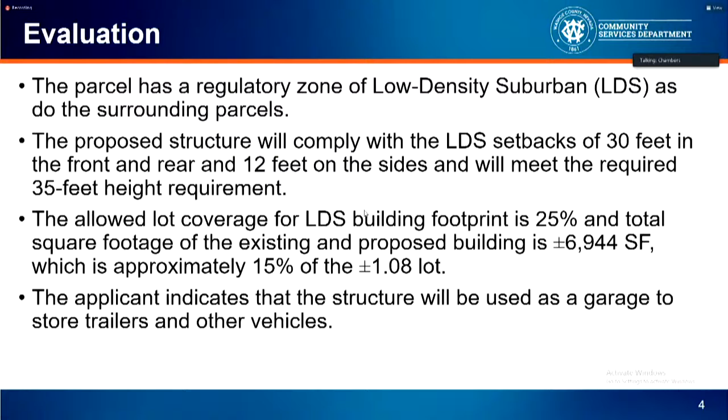The applicant has indicated that the structure will be used as a garage for storage of trailers and other vehicles.

The parcel is relatively flat, and the proposed detached garage will be located in the rear of the property behind the residence. The structure will have electricity and gas to power a heater, and it will be connected to the septic and community water for the bathroom in the structure.

A condition has been included that requires the applicant to obtain a deed restriction at the time of the building permit to prevent the structure from being used as an accessory dwelling unit. The area on the north and south side of the garage will be landscaped, and the structure will be painted a similar gray color as the house.

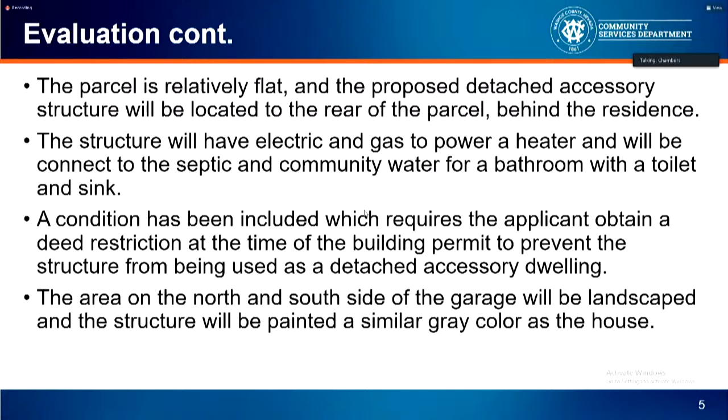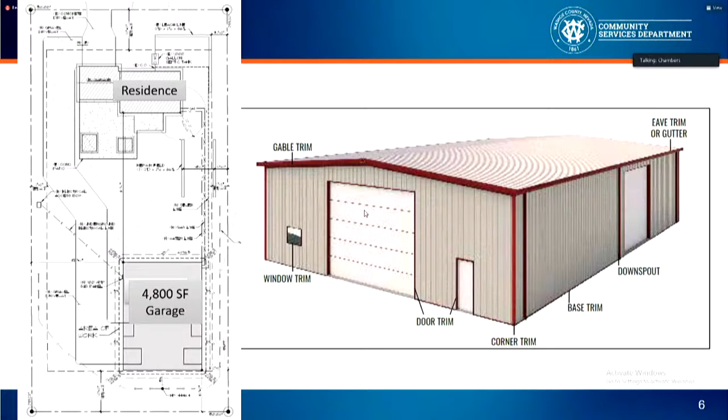Here's a view of the footprint and elevation of the structure. You can see the garage is at the rear of the residence. The residence is at the top of the screen, and the garage is at the bottom.

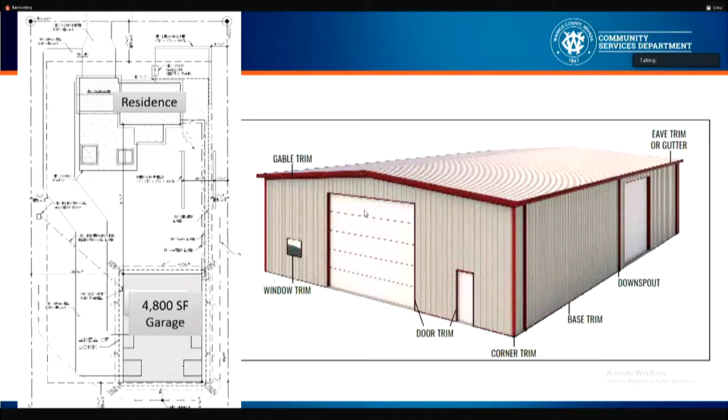Various agencies have reviewed this application, and any conditions from those agencies are included in the conditions of approval. Staff is able to make the findings as detailed in the staff report. There was no neighborhood meeting required for this kind of application. 31 parcels were noticed, and I did not receive any phone calls or emails.

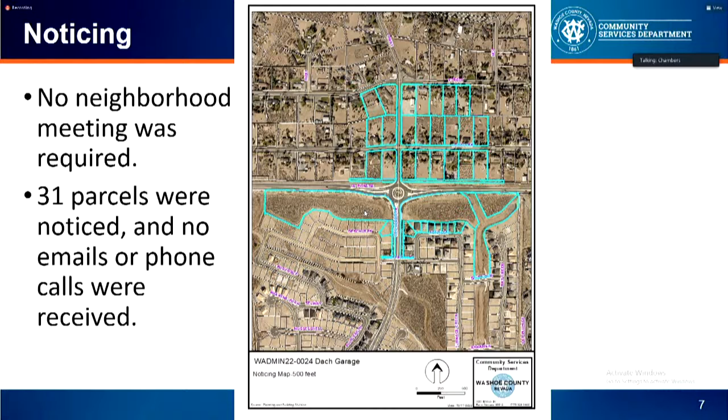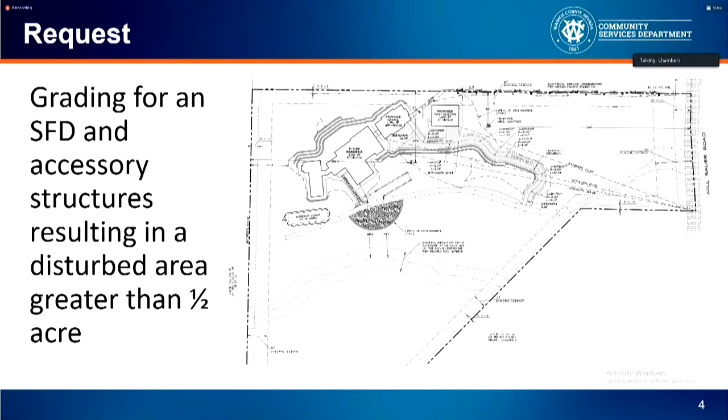Like I said, the grading is for a new dwelling and 2 accessory structures. It will result in a disturbed area greater than half an acre, and that's what triggers the need for a special use permit. Here's an enlarged, but still hard to see, version of the grading plan. I'll dig into it a little bit more later, but you can see there's an access road from an existing road on the property, a few retaining walls, and other site improvements that require the grading.

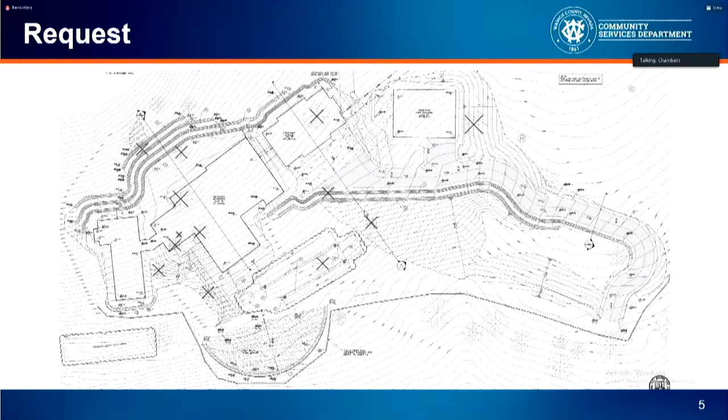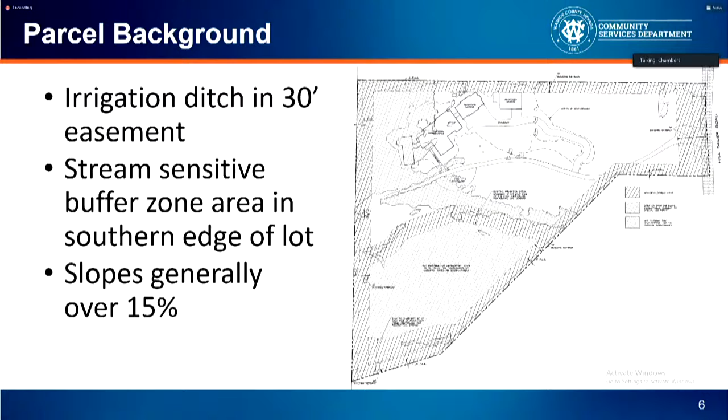The parcel has quite a bit going on it. There's an irrigation ditch within a 30-foot easement that runs across the property, kind of in the middle there. You can see it marked out with some linear hashes, and there's also a portion of a stream-sensitive buffer zone area on the southern edge of the lot for a watercourse that runs on the parcel to the south. In addition, it's generally characterized by slopes over 15% and has a significant area of slopes over 30% as well.

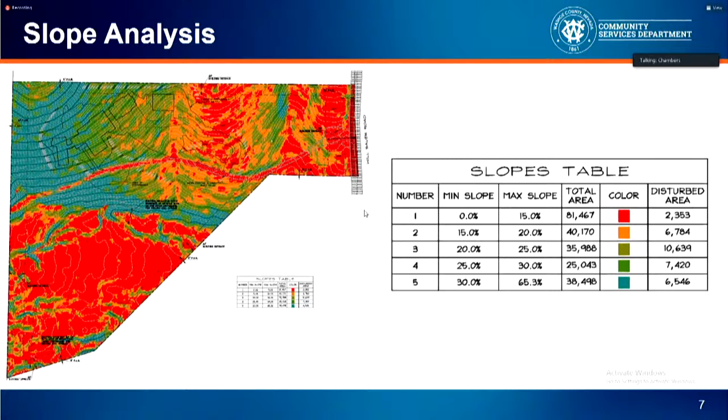Here is the slope analysis that they provided. Red is the flatter areas and blue is the steeper area. You can see that the proposed location of the residence does encroach a little bit into that 30% or steeper area, which I'll expand upon in a moment. But you can see there are some flatter areas on the southern portion of the lot and then also closer to Will Sauer Road.

To talk a little bit about the details of the grading as it relates to our grading standards, all the retaining walls that they've proposed are 4 feet or shorter. There are proposed 3-to-1 slopes, which is within the bounds of our code. And as I said before, there is an existing access road that they're utilizing, which will help reduce disturbance. So overall, the grading you see here is all in line with our code and complies with all of our standards.

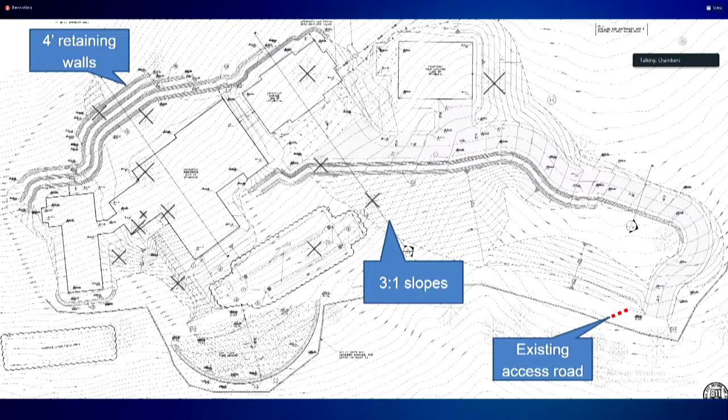One other element of this property is that the hillside development standards of Article 424 are applicable. That applies to residential lots created before 1994, when this was adopted. One of its elements, in addition to some standards which I included in the conditions of approval, is a determination of developable area.

That's the area not characterized by qualities that make it less suitable for development, including slopes greater than 30%, areas of landslides or landslide potential, areas with recently active faults, habitat for rare and endangered species, and significant streams, ravines, and drainage ways.

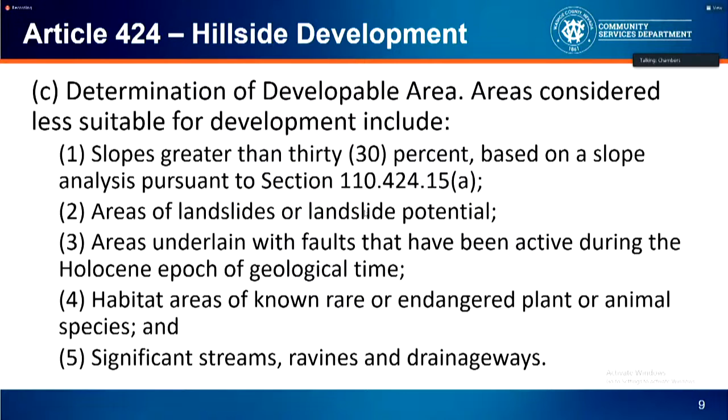Part of the submittal requirements for applications where these standards are applicable is a developable area map, and you can see that here. It has the features we discussed before: the stream buffer zone area, the irrigation ditch. In between that, according to the geotechnical report, there was some evidence of previous landslide activity, which is why that's marked with the chevron-like hash marks.

In the northern portion of the lot, you see in green a relatively contiguous area with slopes less than 30%, and then another area with slopes greater than 30%. As you can see highlighted in red, a portion of the proposed house does go into that area.

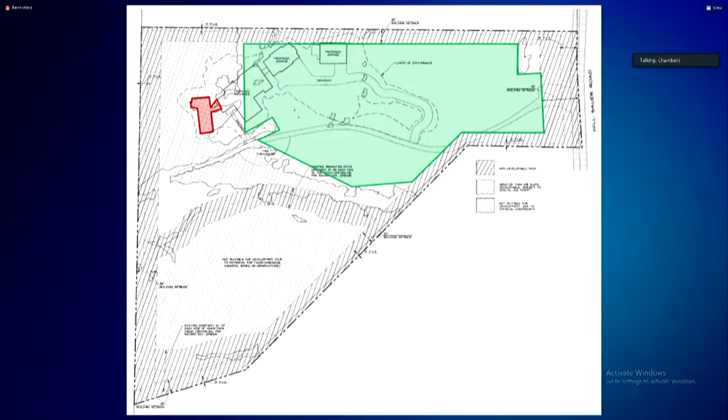That brings us to the question of when encroaching into that area is allowed and when it's not. There are provisions in the hillside standards that allow exceptions to the rule of staying out of slopes greater than 30%, and that's when there are extenuating circumstances.

One of the things staff did while reviewing this was ask the applicant to address those potential circumstances. A memo to that effect was included as, I believe, the last portion of the application packet that you all received. The main thing they referenced that was significant to staff was that the location of the house helps maintain a greater number of existing native trees.

The reason that's significant is that, as I go through in the staff report, the maintenance of existing vegetation is one of the stated goals of the hillside development standards. Since the threshold laid out here is extenuating circumstances, staff thinks that could be considered an extenuating circumstance to encroach a bit into those 30% or steeper slopes.

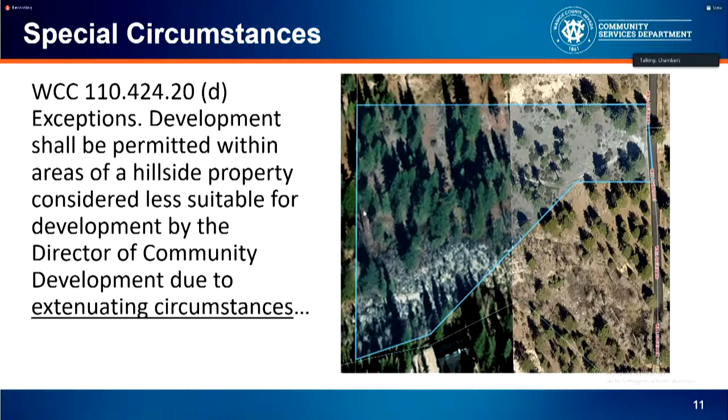With that in mind, 18 agencies reviewed this and provided conditions as well. Notice was sent out as usual, and staff can make all 5 findings: consistency with the master plan and area plan, adequate improvements, site suitability, issuance non-detrimental, and effect on a military installation. I'll mention that, as you saw in the packets, a number of comments were received from surrounding property owners, and they were all neutral or in favor of the proposed application. So with that, here's a sample motion for approval with conditions, and I'm happy to answer any questions.

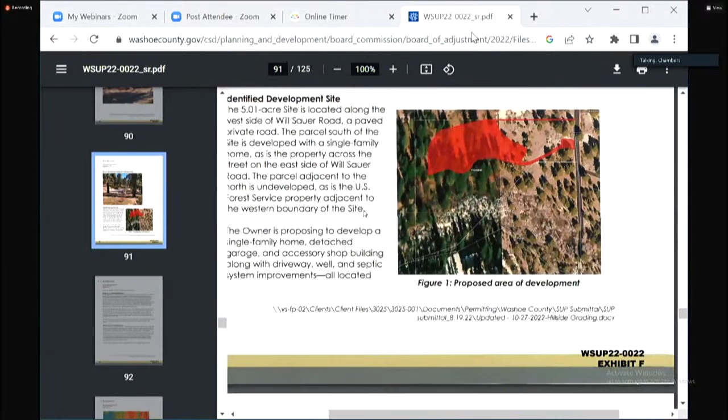The chair asks for further questions. Mr. Stanley asks about the mention of mature trees and trying to save them, wondering if there's a ballpark figure for what 'mature' means in years. Staff responds they don't have an exact figure in years, but having conducted a site visit, noted a number of trees are quite tall and generally look very established, and refers further details to the applicant.

Seeing no further questions for staff, the chair asks if the applicant is present and wishes to speak on the matter.

Rob Anderson introduces himself as a professional engineer registered in several states including Nevada, and the applicant's representative. He notes Ms. Dolan, the applicant, is also present via Zoom to help answer questions. He states he wants to be brief and that the staff report, as Mr. Christensen pointed out, was very thorough and well done.

Mr. Anderson states the applicant concurs with each of the findings. His staff at R.O. Anderson Engineering, including professional planners, landscape architects, and civil engineers, went through the findings in great detail and concur with the assessment, and agree with the conditions of approval. The applicant is anxious to proceed with constructing their primary residence and the facilities shown in the plans.

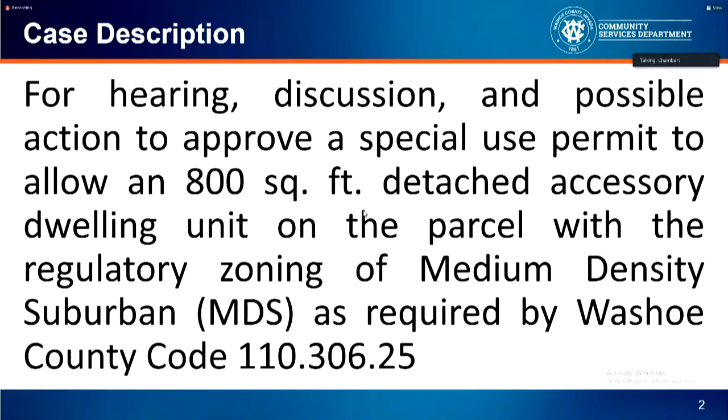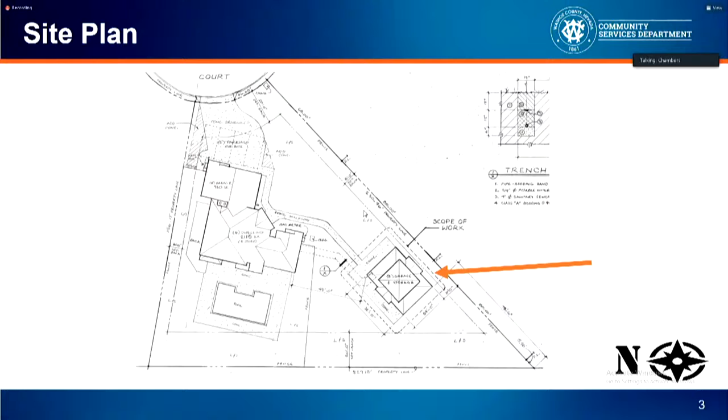One moment please, there we go. Of approximately 800 square feet or a little bit less, within a parcel that is zoned medium density suburban, MDS, in the Southeast Truckee Meadows area plan. Here we have the site plan, north is to our left here. There's an existing detached accessory structure that's going to be heavily remodeled. The bottom floor will essentially remain a garage, and a new second story will be the proposed accessory dwelling unit.

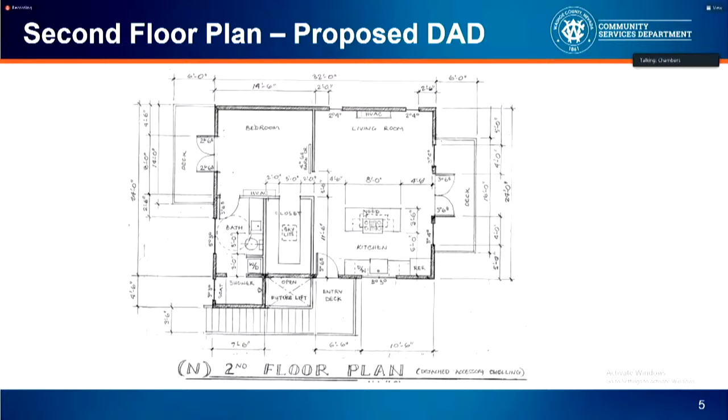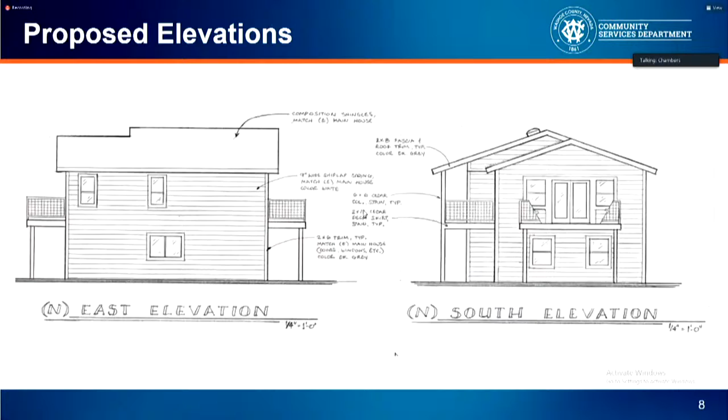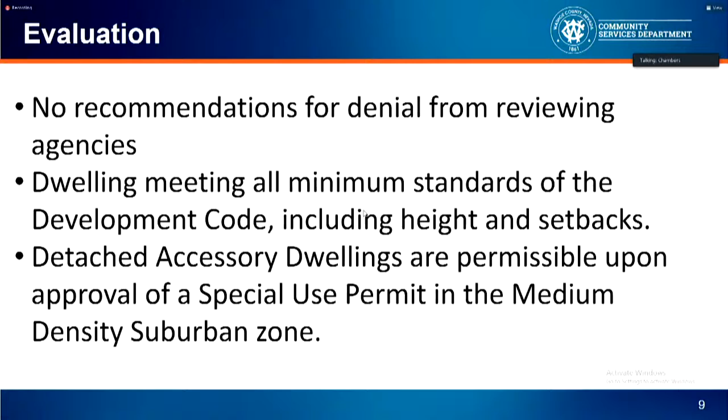This was provided to all of the relevant agencies, we had no recommendations for denial. This will meet all of the required setbacks for the regulatory zone. Detached accessory dwellings are permissible in the MDS zone subject to the approval of a special use permit. Public notice was provided, and that map and documentation is included at, I believe, Exhibit D in your staff report. We have comments on each of the required findings. Staff believes that all of those required findings can be made.

We did, however, have several letters in opposition. About 4 of them were included with your staff report, and another 4 were received by staff after your staff report was completed. I believe all of those letters can be characterized as expressing that this proposed project will be detrimental to the character of the surrounding area. That is their opinion, they have the right to express that. In addition to the 4 included with your packet, these were also provided to you prior to this hearing, and there they are. In the interest of time, I'm not going to read each one of those in as they have been provided to you.

After a thorough analysis and review, I am recommending approval of the proposed detached accessory dwelling with conditions as included in your staff report. Should you agree, we have a proposed motion. On the other hand, should you disagree, we also have a motion available for you. And with that, I'm available to address any questions you may have.

Thank you, Mr. Pelham, I do have a couple questions. On Exhibit A, under the Washoe County Development Code, it says this is an amended application. Do you know what was amended? Initially, the plan submitted included turning the first floor into a dwelling and having a stairwell up to a second floor they were calling storage, but the way that was configured, it was all as one, and the storage area would have been included in the dwelling unit, which is bigger than allowed in the regulatory zone. In the MDS zone, a detached accessory dwelling is limited to a maximum of 800 square feet. This one's about 768 under the submitted plans, so we're still okay. Our notice was for 800, and we can always do a little bit less than that.

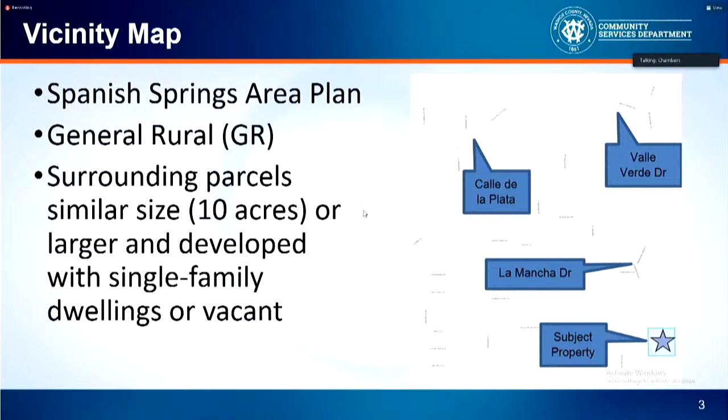This property is located at 2410 La Mancha Drive, in Spanish Springs. It falls within that area plan, and you can see here it's near Calle de la Plata, that area. It's zoned general rural. The parcel is 10 acres. The surrounding parcels are either a similar size or bigger, 40 acres, and are generally developed with dwelling units or are vacant.

This proposed grading is for a dwelling and some associated site improvements that will result in more than half an acre of disturbance and excavation of more than 5,000 cubic yards. Both of those things would trigger this special use permit.

There is also a request to vary standard 438.45C to allow for a difference from natural grade of 19 feet. The code generally limits it to 10 feet.

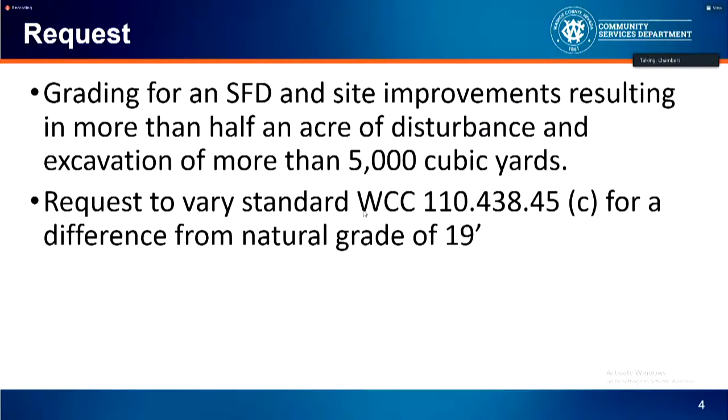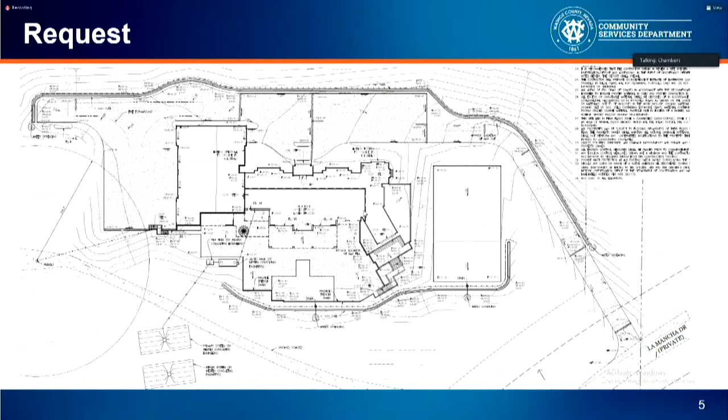Here's a figure of the grading. As you can see, a couple of retaining walls, there's the home, and then pretty extensive site improvements as well. You see a field there to the right of the residence, and then the driveway and parking and those sorts of things. So all that's part of this grading request, or rather, the grading request will support those improvements, and the improvements will be permitted down the line.

To give some background on the site, slopes are generally 10 to 40%. You can see in that figure, it's mostly under 30%, but with significant slopes throughout the site. It's generally vegetated with brush, and this site, because it's on a pretty exposed hillside, is visible for quite a long ways downhill. So that's something to keep in mind, and that will be relevant to some conditions I've proposed later.

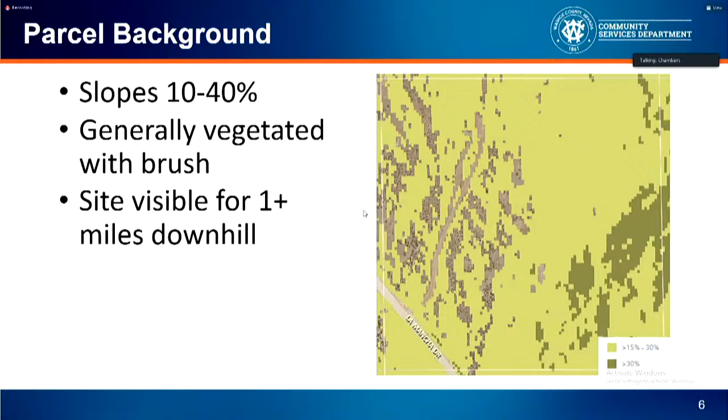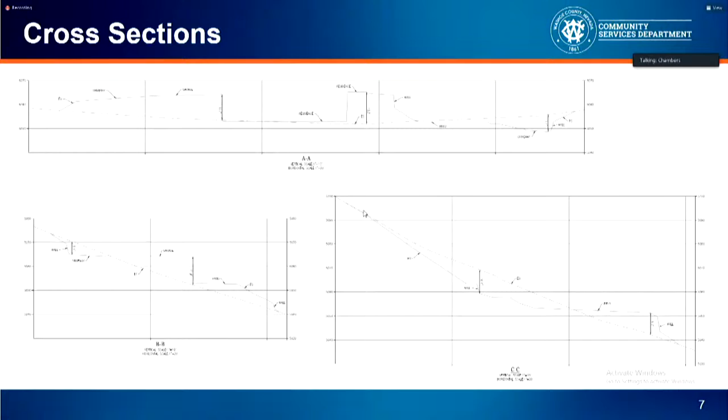Here are cross sections provided by the applicant. The one on top is taken parallel to the grade, so it's across the whole site. You can see the dip there where the residence is, the garage up above there, the field, all that sort of stuff. And then the two below are taken perpendicular to grade, so those are where you can see a bit of terracing, which is something we like, those design elements. As I mentioned, they are requesting a 19-foot difference between natural grade and finished grade. We don't have a cross-section showing that, but I believe that's in the middle of the proposed residence.

Some details about the grading: there are 2 retaining walls proposed. The one above the site improvements is 4 feet. The one below is 6 feet. There are 3-to-1 slopes proposed, and all this falls within the bounds of our grading code. The one deviation they're asking for is for that 19-foot difference.

You can see here they're pretty large, long retaining walls. And so one of the standards in our code is that 90% of any cut slopes be shielded either by buildings or by landscaping. So that's one of the proposed conditions, 1F.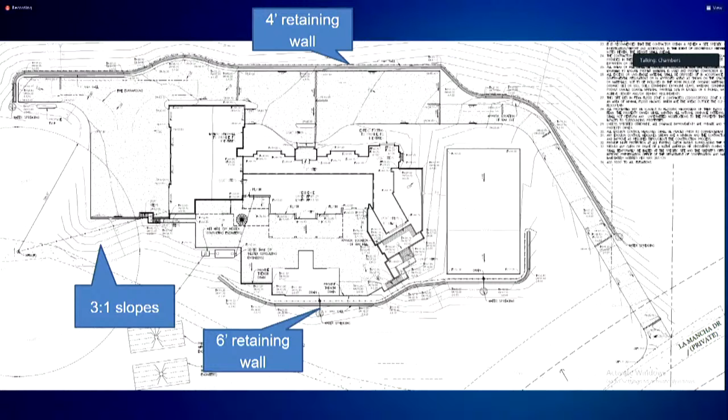And you guys have been handed some proposed modifications to staff recommended condition 1F that basically allows for a bit more flexibility in arranging the landscaping, and differentiates between that upper retaining wall, which is where we have that code requirement for 90%, so that's reflected in the condition. I'll just pull it up. The changes are highlighted in red, and then 50% total coverage of the lower rockery wall. So the reason this condition is proposed is because, like I said, there's a lot of visibility of the site.

That would be true whether or not it was the extensive grading or any house, it's going to be visible just because of where it is. Since they are asking for that 19-foot difference, the intention of this condition is to mitigate the visual impacts by softening the look of just a wall of rock or of green. That's why this condition is proposed. I'm happy to answer any questions about it.

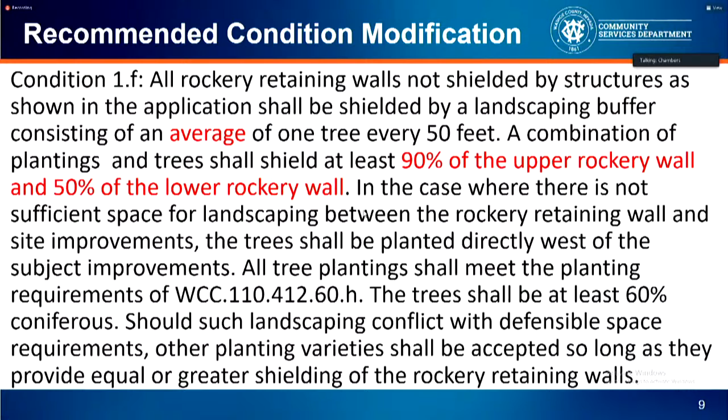Another note is that the construction time condition on this one doesn't include that equipment start-end time clause. So if you guys want to make that modification, let me know, and I will include the condition from the previous grading staff report.

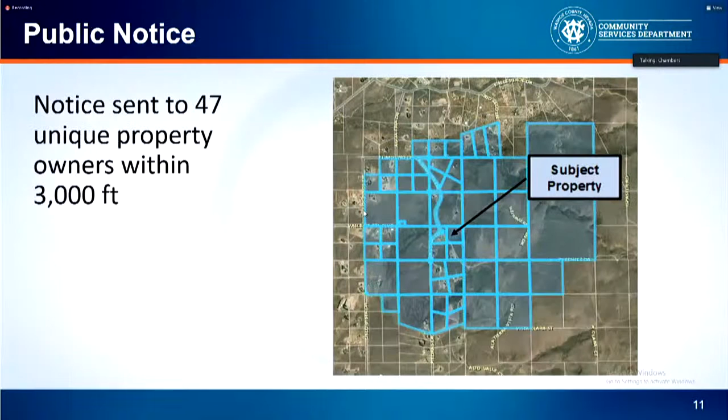15 agencies reviewed this. Some provided comments, some provided conditions. Notice was sent out as usual. I haven't received any phone calls or emails or comments. Staff can make all 5 findings for approval: consistency with the master plan and area plan, suitable site improvements, site suitability, issuance not detrimental, and no effect on a military installation.

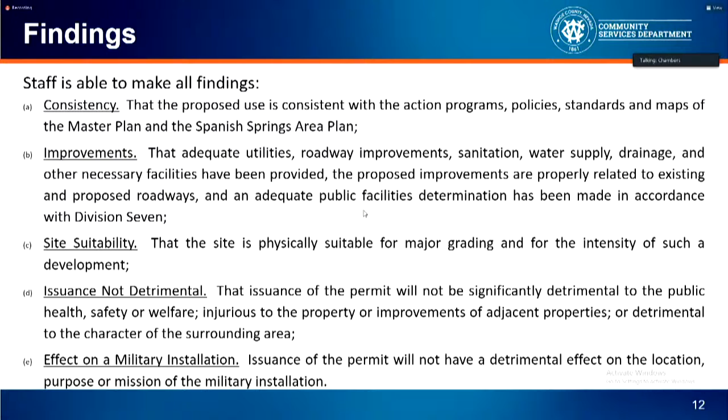Thank you. Are there any questions for staff? Mr. Stone. I'm sorry. Ms. Julian, go ahead. Thank you.

Yes, for staff, there's a reference in the Conservation District comment that if roadside ditches are constructed lining the flow line with 4 to 6 inch rock, it will minimize transported sedimentation. Was that covered somewhere in the conditions or in the design?

So engineering provides conditions regarding drainage and those sorts of considerations. They provide conditions that were sufficient to meet their standards. I did not add anything additional outside of their conditions that they proposed.

If I may weigh in also on that, oftentimes we get these comments from the Washoe Storey Conservation District, and they're more of a recommendation or a suggestion. We are very cautious about conditions that may overlap with the review requirements of our engineering department. The last thing we want is to impose conditions that may be in violation of engineering standards. That's why this condition was not added.

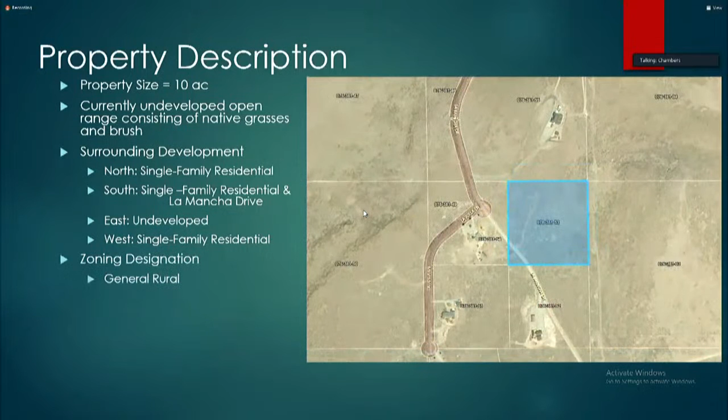The property is located at 2410 La Mancha. There's existing single-family development north, south, and west. It's undeveloped to the east. The zoning is general rural, and the master plan is rural. The proposed development is consistent with those zoning districts and master plan.

The proposed improvements will include a house and the associated driveway, utilities, rockery walls, etc. The grading special use triggers are for earthwork volume, as well as a variation of standards for 13 to 19 feet of cut and fill.

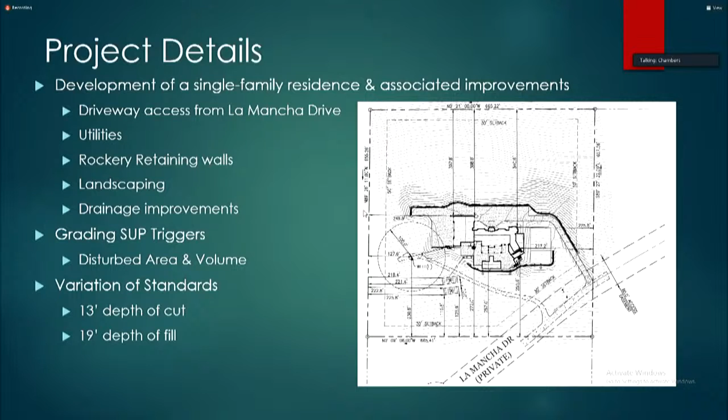As we're coming down the slope and terracing, there's a balancing act we play. That 19-foot cut or fill sounds excessive, but later in our presentation we'll get to where that is, and hopefully that will calm down some of the concerns.

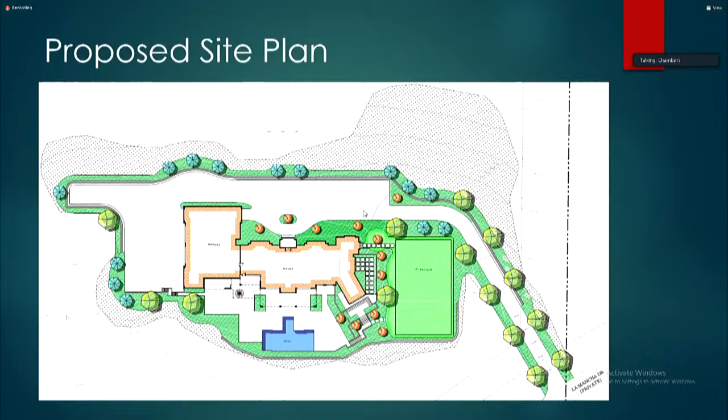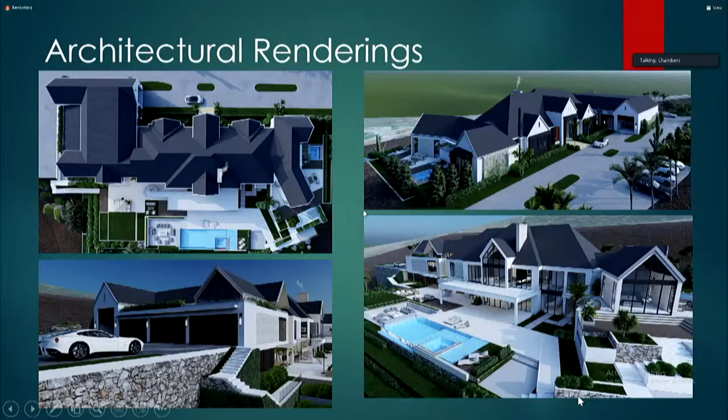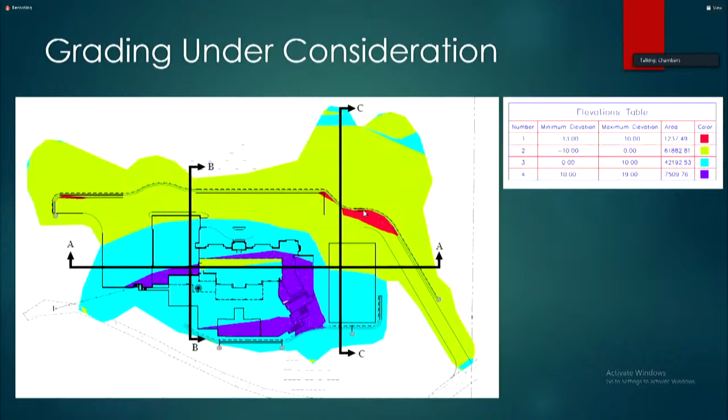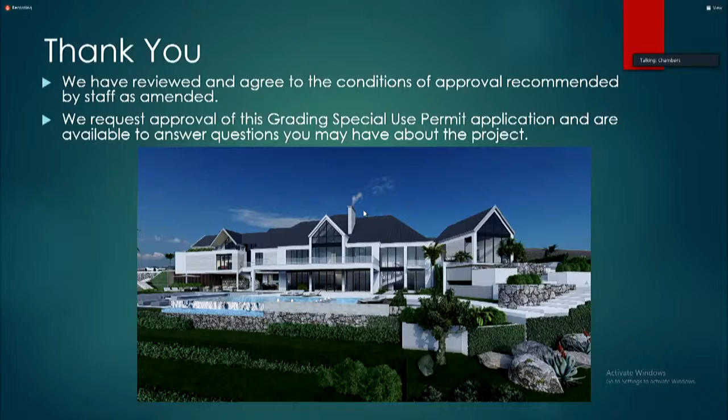We have reviewed the conditions of approval and worked with staff to amend condition F. We are also more than open to limiting construction mobilization to 7 a.m., not even turning on equipment, and are happy to answer any questions. The applicant, Mr. and Mrs. Rappy, are both here, and the landscape architect is here as well if you've got any questions, and I'm here on the civil engineering side to answer those as well. So we thank you for your consideration and request your approval.

Thank you. Is there any questions for this gentleman? Seeing none, thank you very much. Do the applicants wish to add anything further to this? Yes.

I wanted to point out that the property, you can't see how the actual grade is, but it's sloped like this. So we put the house in the middle of the slope to decrease the amount of fill or cut we had. But to get the driveway up there, we had to come up on top of that hill, and we're filling the center of that section. So there's two sections that are probably 20 feet higher than the dip. We put the house in the middle to decrease the amount of dirt we had to bring in or take out.

So that's where a lot of what Mr. Christian was saying comes into play. Because we moved the house, I actually made him redo that 3 or 4 times, trying to get it to where we didn't have to cut as much or bring as much in or do as much work to the land. Secondly, the rock wall, we're going to use all the rock from that area, so it'll be colored as you'd expect. It's not like we're going to Home Depot and buying red bricks or the big concrete blocks they use. They're actually going to be indigenous rock to the area.

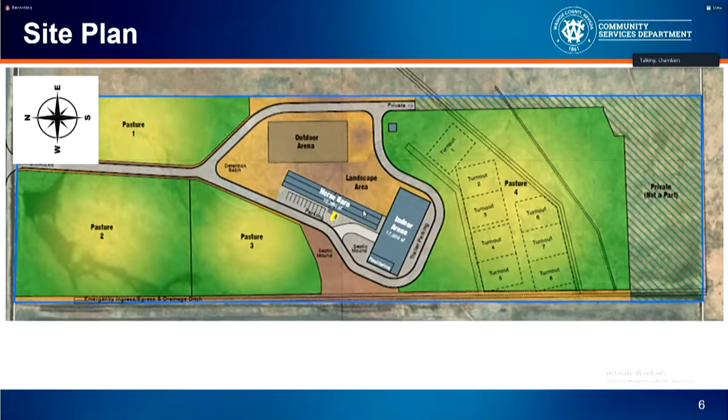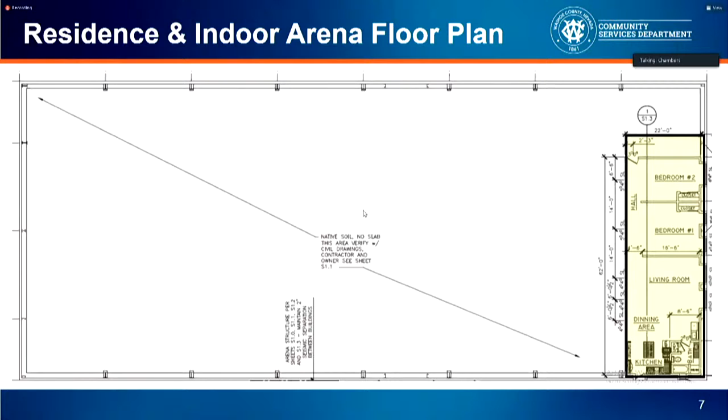And here is a layout of the floor plan of the arena and the residence. The residence is highlighted in yellow. And then this is the barn with stalls. There's an office, restroom, area for tack to be stored, and so forth. There's 31 stalls in this barn.

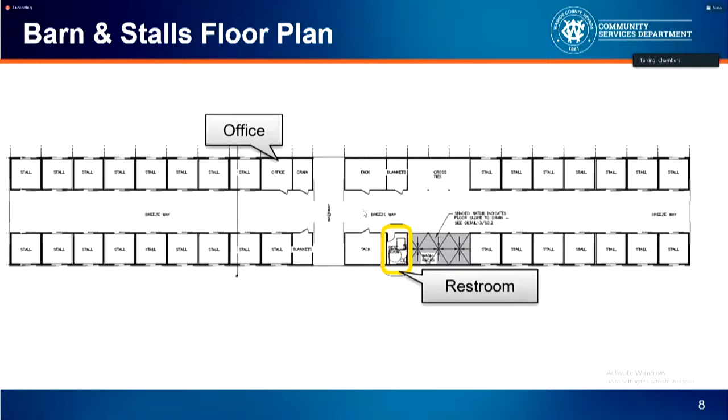The majority of the 20-acre site will remain open to pastures, with the 3 pastures in the front and 8 turnout areas in the back. The facility will only have training for the horses that are boarded at the facility. Horses will not be brought onto the site if they are not boarded there.

The hours of operation are 8 a.m. to 6 p.m., 6 days a week. There will be 1 caretaker on the site 24 hours every day, along with 7 employees, 4 full-time and 3 part-time staff. The stalls will be cleaned daily, and flies will be managed with a product called Fly Predator.

The site is relatively flat, and they're only proposing to grade approximately 3,756 cubic yards, which does not meet the major grading thresholds, so there's no special use permit required for the grading.

Access is from William Brent Road, a 2-lane road, and there's also an emergency access along the western side of the property where there's a ditch. I'll show you a picture of that in the next slide or two.

The applicant indicates that traffic generated will be minimal, about 20 average daily trips, with a peak flow of 4 to 7 in the AM and PM. Due to the minimal increase, no traffic study is required.

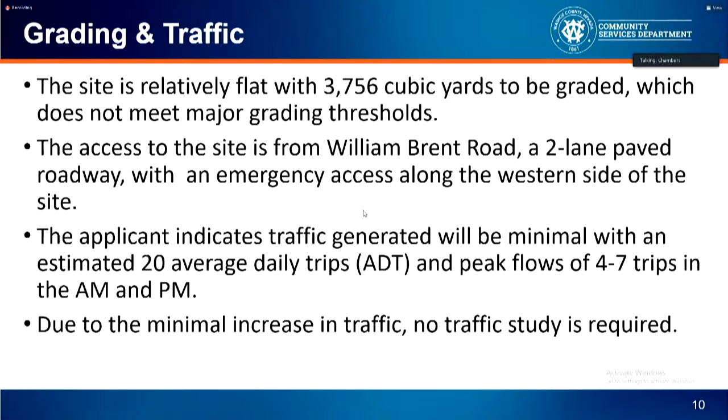Parking for a horse facility is based on the number of horses on the property—basically 1 parking place for every 4 horses. So with 31 horses, there are 8 parking places required, plus additional parking for employees. The applicant is providing 15 parking places, which should meet the needs of the site.

There's parking along the west side of the barn, and one paved ADA parking place. Trailer parking will be located at the south side of the barn, which I'll show in the landscaping picture.

Landscaping for this property is required at 20% of the site since it's commercial. The breakdown is approximately 0.86 acres landscaped with ornamentals, about 0.8 acres of native landscaping, and 6.3 acres used for pasture. The proposal includes about 73 trees and 483 shrubs.

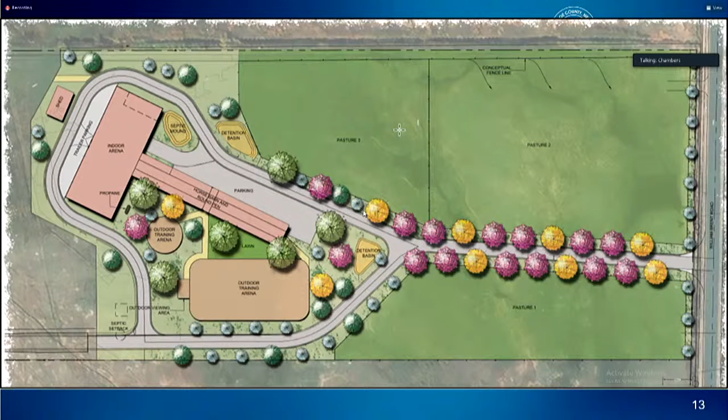As I said earlier, they are asking for modifications—specifically not to have to pave the driveway, parking area, and maneuvering area, though they will pave the ADA parking space. This is fairly typical for riding stables because of the safety of horses and riders, since horses can slide on pavement.

If a horse gets excited and there's a rider on it, they can come off, and it's not a pleasant thing to come off on pavement. It's not pleasant to come off a horse anyway, but on pavement it's even more dangerous.

They're also asking for a modification not to have to buffer along the property lines. This location is somewhat rural, and there are no property owners located right next to them.

They are proposing to put trees every 25 feet along the frontage, so that's part of that section of code that they are meeting.

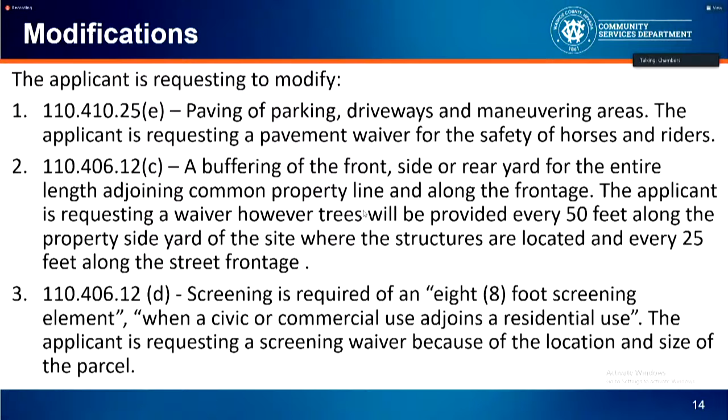They're also asking to modify the screening requirement because of the rural location. It's not unusual to have riding stables in this kind of setting—you're used to seeing barns and similar structures out in these areas, so it's not like there will be commercial activity that's hard for adjacent property owners to have next door.

The applicant held a neighborhood meeting on August 16th at the Washoe Valley Community Center, with 7 people attending. They had questions about events, waste disposal, lighting, and dark skies, and I did put a condition in the conditions of approval that they have to meet dark skies requirements.

32 parcels were noticed, and I did not receive any emails or phone calls about this facility.

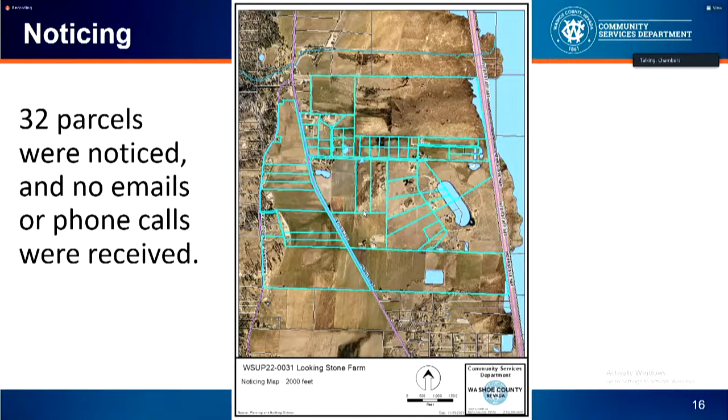The application was reviewed by various agencies. Any agencies that had conditions, those are included in the conditions of approval, and staff is able to make the required findings as detailed in the staff report. I'll provide a possible motion. The applicant or applicant's representative is here and has a presentation, and I'm available for questions, whichever you'd like first.

Thank you. Are there any questions for staff?

Kathie Julian, for the record, can you expound on this? There was a reference in the conservation district's comment to a bioretention facility. Could you explain where this is and its significance? Julee Olander, for the record. I'm not familiar with that or what they were requesting. I didn't reach out to them specifically on that. As it's been pointed out in the past, the conservation group provides comments, but we have no way to condition their comments, so that's not something I pursued. I can't answer that fully. Is there a bioretention facility in this project? Not that I'm aware of. So I was a little confused by that comment.

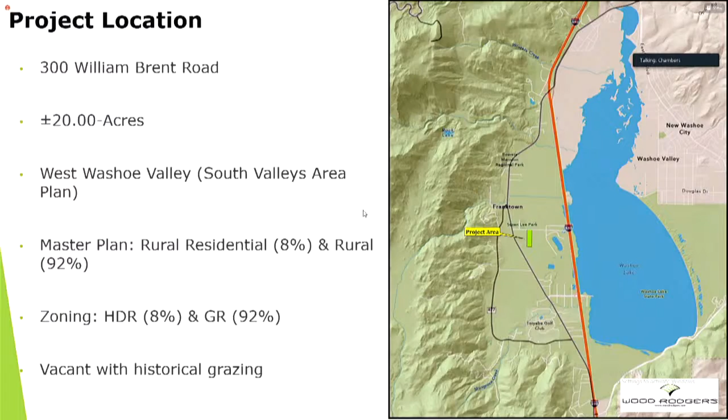Obviously this area has a lot of historical agricultural as well as ranching going on, and I think this graphic illustrates it really well. I just want to point out that this is in the West Washoe Valley Character Management Area and the South Valleys area plan. You can see the property highlighted here in yellow, and a lot of this is agricultural—there's a lot of pastures around here, open views of the surrounding neighbors in the valleys. There's also a lot of residential on these larger lots, 10, 20, 40 acre lots, and some agricultural and commercial uses mixed in throughout the valley here.

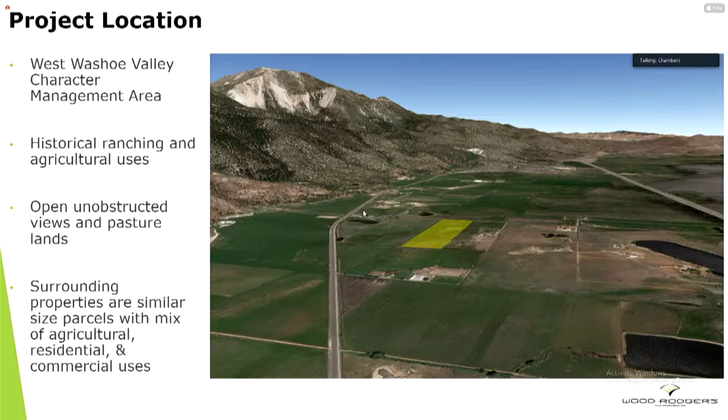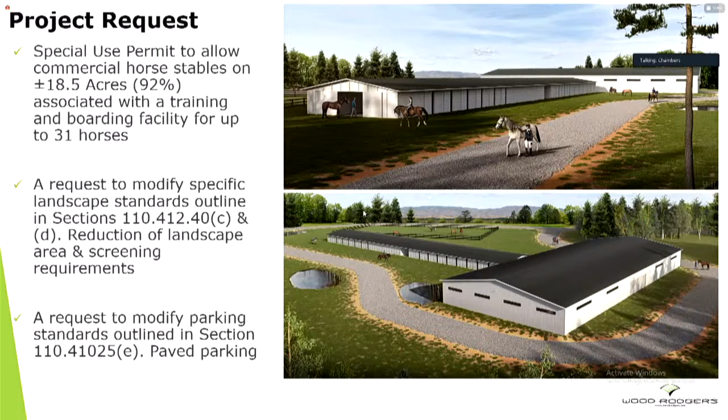So what we're requesting again is a commercial horse stable facility for up to 31 horses. And because of the character management area this is located in, we are requesting a modification to the landscape standards, including the reduction of the setback requiring landscaping of the whole setback, which I'll get into details a bit later, the screening requirements that we address with an 8-foot tall fence or wall, and then paved parking.

So just to give you an idea of the operations and use of this facility, we are not asking for any types of special events. This is for the boarding of up to 31 horses, as well as a training facility. This is strictly a training facility for these horses, and then they go off and leave the facility to go to shows. So the only people besides employees coming here are clients, either the owners or the riders themselves, and those people will be scheduled with a certain day and time.

There are 7 employees, 4 full-time and 3 part-time, working in a 5-day rotating shift, so it's very rare that all 7 employees will actually be at the facility at one time. And there's probably not going to be more than 4 clients at a time, so very low traffic generated by this.

The owners and operators will be living on site. As Julie explained, there is a living quarters in the indoor arena, and the horses will primarily be located in the horse barn when they're not out in the pastures or in the indoor arena for training purposes. So the normal business operating hours requested are 8 a.m. to 6 p.m., 7 days a week.

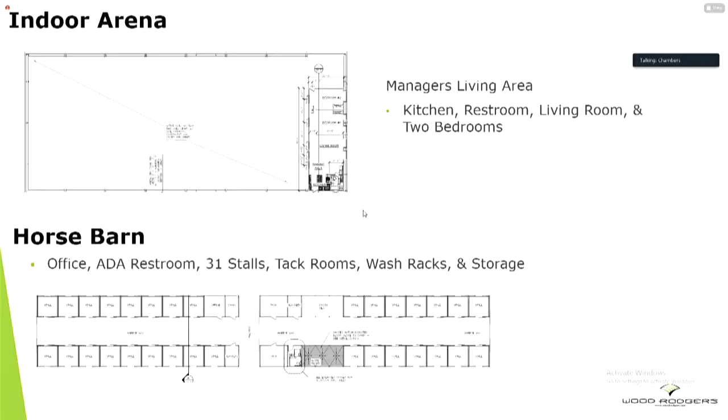Julie already touched on this — this is the layout of the indoor arena as well as the horse barn and what's provided in there, so I'm just going to skip past that and get into the requested modification standards for the landscaping.

So code states that of the disturbed area, 20% is required for landscaping, and we have approximately 5 acres being disturbed with all the site improvements I just mentioned, so 20% of that is 1 acre. With residential adjacency, typically in code, if a commercial use is next to a residential one, you have to landscape the entire setback. On this site, there are 50-foot and 30-foot setbacks, and landscaping the entire perimeter at those widths is a significantly large area that would not fit with the character if we had to landscape that much.

So we're proposing to pull that landscaping into where the disturbed areas are, leaving the pastures open. We're not screening off the pastures because these are within the character of the area. We're putting the landscaping along the buildings and the driveway — the elements that actually need to be screened are being softened with the landscape area.

And then again, we're asking for a modification to the screening standards. It's not going to be appropriate to put an 8-foot solid fence or wall to block out pasture land. So we are proposing just to have a split rail fence that's traditionally seen in this area within the pastures.

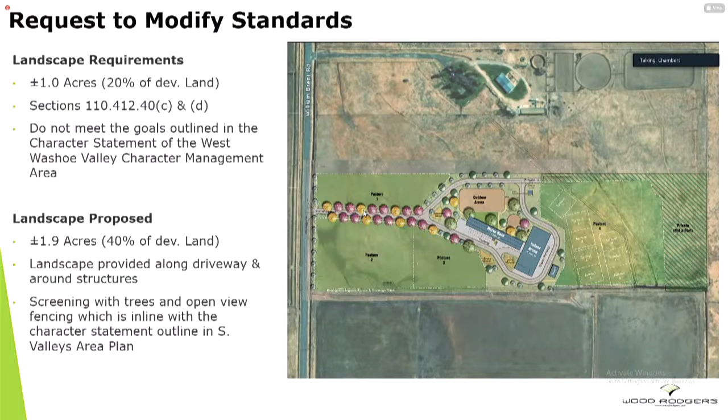Looking at the parking modification standards, we are providing as much parking as required. There's plenty of parking along where the horse barn is. That's the majority of the riders and employees are going to need to park. They will have direct access to the office as well as the ADA accessible stall.

There will be one paved parking area spot. This is to meet ADA requirements, and this will be paved going into the actual horse barn. Everything else, including the driveway, 24-foot wide driveway, is proposed to be gravel.

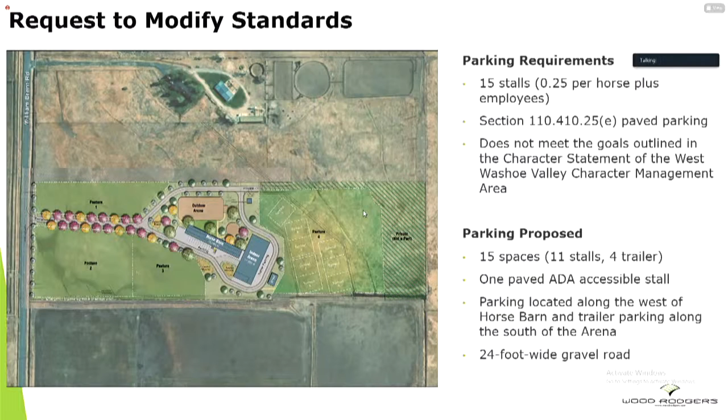So with that, I'd like to conclude my presentation. I just want to reiterate that commercial stables are allowed use within the HDR and GR zoning with the approval of the special use permit.

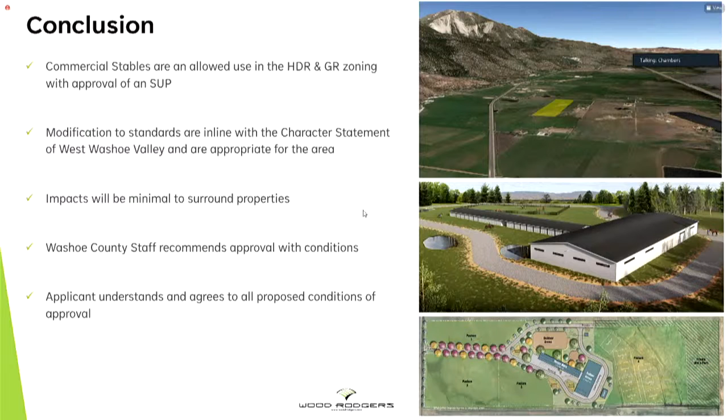By modifying the standards of the parking as well as the landscaping, we're helping to meet the character statement of the West Washoe Valley area plan. And the impacts to the surrounding community will be minimal with the traffic that is going to be expected to be generated from this. So Washoe County staff does recommend approval with conditions, and the applicant has read all those conditions and understands. I'd be happy to answer any other questions you guys have. So thank you for your time.

Thank you. Are there any questions for this gentleman?

Okay, so did you have any view on a recommendation that the bioretention facility have a 2 feet wide, 3 foot deep infiltration trench the length of the basin to encourage recharge and prevent water runoff pollutants from entering the downstream natural drainage? Initially, I don't have any concerns with that. This will have to go through an engineering process, but I don't see any reason why we wouldn't be able to accommodate that.

Any other questions for this gentleman? I have one, I think. Mr. Stanley, go ahead. In the very nice Wood Rodgers package, slideshow, could you flip back a couple of slides? I have a question about one of them. Can you go back in the slides? Is that doable?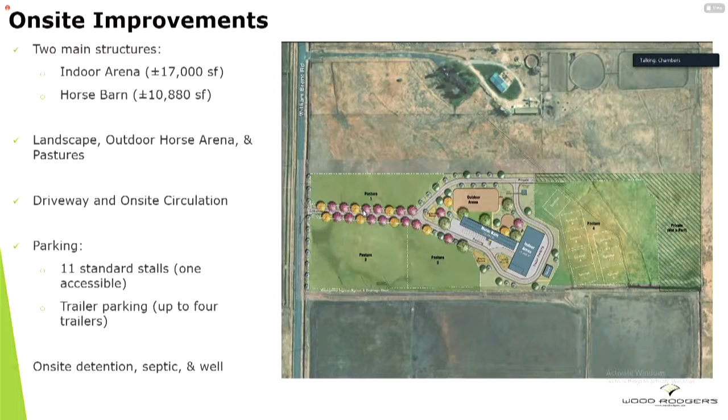Was that accidental on purpose, or can that be augmented? So you're concerned that we don't have enough trees screening between the proposed structure to the right-hand side and the sight line to the nearest residence in this.

And the reason I mention that is because around the travelway there, you've obviously landscaped it for more trees, but not in the line of sight area. And I was wondering why.

Okay, so these landscaping plans are preliminary, so we can revisit that when we go forward to the final design. The only reason I mention it is because there's such a drastic reduction already, and for good reason. In the final design, we can concentrate a majority of the trees around the actual building itself to help screen it. For example, the entryway with the nice English style tree line there on both sides, something akin to that, at least on one side, to help the sight line for the adjoining property.

Okay, yeah, we can definitely look into that and try to provide that. So would that become a condition, or how do we approach that, one wonders?

Julie Oland for the record. I don't know if we need to make it a condition. I think it's been stated in this meeting, so I would say we can just ask the applicant to beef up that area with more trees. We've had that situation come up before where, when the landscaping plan comes in, they've moved trees around a little bit for various reasons. So this is conceptual. We've asked for trees to be next to the structures as best they can. I think that's something that could easily be looked at when they come in for the building permits, to make sure there are trees there.

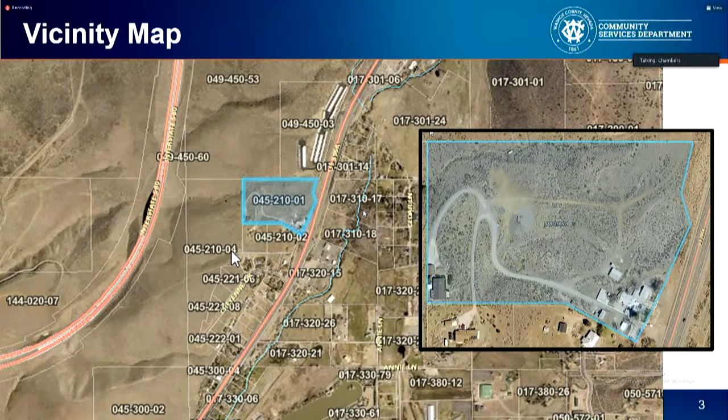So the site is located off of Old Virginia, Old South, the Old 395. You can see where it's located, and then there's a larger view of the site showing what's existing on the site currently.

The parcel has a master plan designation of rural residential, and the subject parcel to the south has the same, and the subject parcel and the parcels to the south have the regulatory zoning of high-density rural, as does this parcel, and the parcel to the east has a regulatory zoning of general rural. The parcel to the north has a regulatory zoning of neighborhood commercial, and the GR parcel is located within the City of Reno's sphere of influence. The parcel is within the South Valleys area plan and within the Steamboat Rural Transition mixed-use character management area.

The proposal is to construct a new 29,944 square foot school building along with an athletic field in the upper portion of the site.

The buildings fronting South Virginia have been found to be structurally unsound and will be demolished. The area where the proposed school is to be located is vacant, however, a portion of it has been graded.

The school will accommodate kindergarten through 12th grade and will allow a maximum of 150 students: 75 elementary, 30 middle schoolers, and 45 high schoolers. The school will include classrooms, an assembly area, a chapel, and an office.

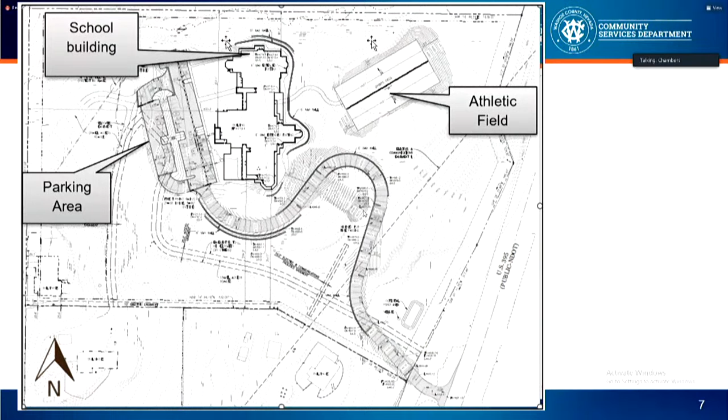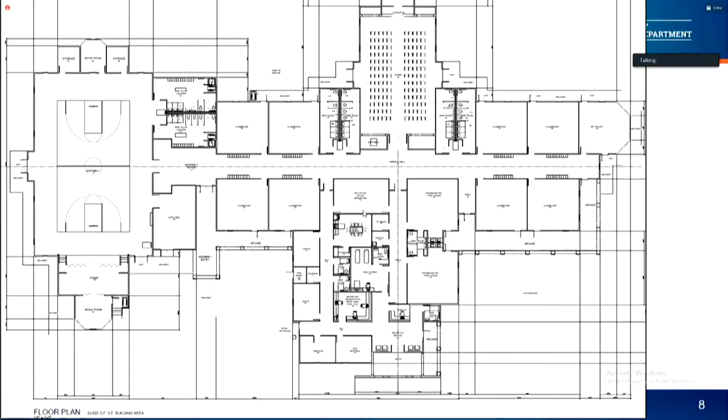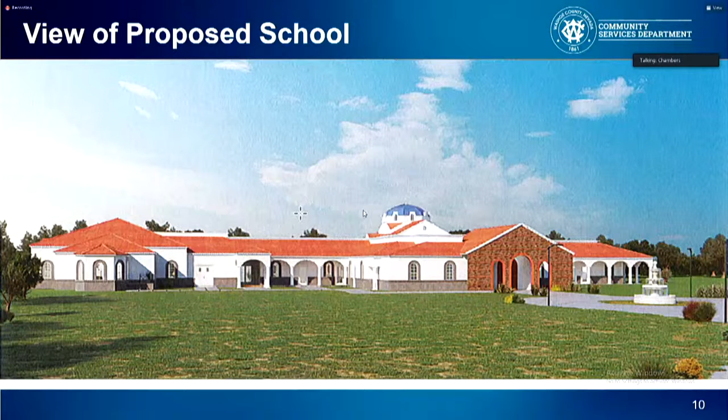The topography of the site is somewhat challenging, and the school is going to be located in a portion that is not as steep, and that's one of the reasons they're proposing to put it there.

Some of the area has been previously graded, as shown in the previous slide, but they're going to have to extend that area to build the structure and the athletic field they're proposing. The grading is primarily for the driveway, the parking lot, the building pad, and the athletic field.

The applicant does not trigger Article 424, which is hillside development.

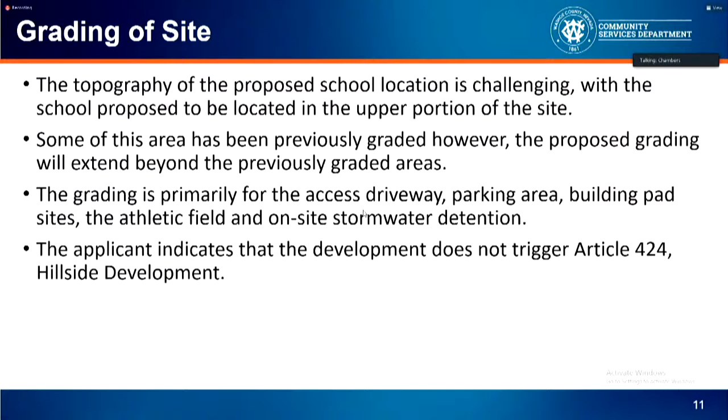So here's the grading. You can see this is just showing more of the slope. I have another slide that'll show it a little bit clearer, but you can see what the slope issues are on the site.

And then this shows it a little bit better. It shows where the 2-to-1 slopes are located along the roadways, and also around the athletic field.

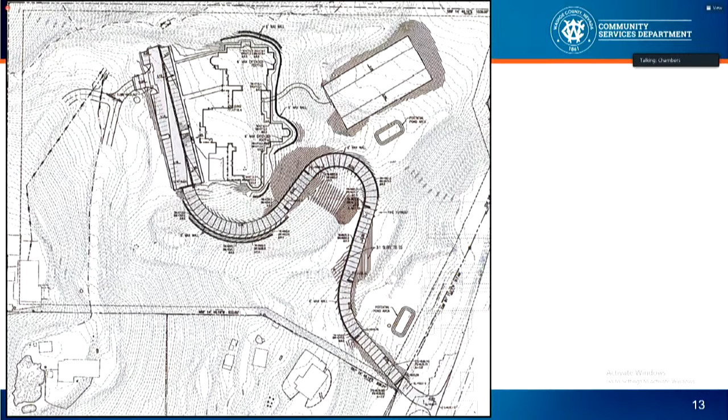So the applicant, like I said, is meeting the major threshold requirements because of how much they're disturbing. However, they're proposing to try not to disturb as much and keep the 3-to-1 slope, using retaining walls to maintain those areas of slope.

I'm sorry, I sort of jumped over that. I don't know if you want me to read through it, but they're disturbing more than 3.8 acres of slope that have a grade of 15% or greater.

And as I said, that triggers the major thresholds. They're disturbing 2 acres, and per code, that again hits the major thresholds.

For stormwater detention, they are proposing a site design that'll help the flows off the property be equal to or less than pre-development conditions. The site will be graded to direct flows away from the proposed buildings and into a detention pond located at the entrance of the site, which I'll show in a few slides.

The applicant further indicates the steep slopes that will not be disturbed, the steeper slopes shown in the previous slide where you saw the slopes.

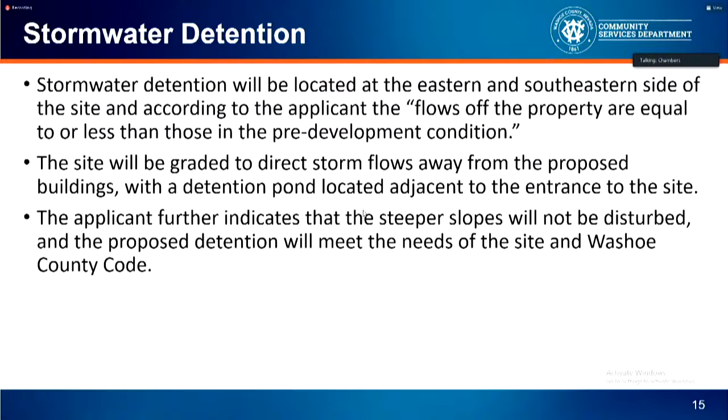The site has an existing well and septic system, and also has power from NV Energy and garbage disposal from Waste Management. The applicant will need to work with Washoe County Health District and the State of Nevada to confirm that the existing water and septic meet current codes and requirements of the proposal, and the health department has provided a condition to further state that requirement.

According to the applicant, the traffic proposed with the site is looking at 372 average daily trips, 122 AM/PM trips, and 26 PM peak trips. The applicant will provide a full traffic analysis with the required encroachment permit from Nevada State Department of Transportation, and they may need to address additional traffic mitigation needs. The Washoe County Engineering and Capital Projects Division has provided conditions to address any traffic issues that might come up from that NDOT study or encroachment permit.

Concerning parking, the requirement is 0.25 parking spaces per student of driving age, along with 1 parking space per employee during peak employment shifts. The site is to have 150 students, with 45 of driving age, which requires 11 parking spaces, plus an additional 8 employees. The applicant is providing 54 parking spaces with a drop-off and pickup area in the circular driveway.

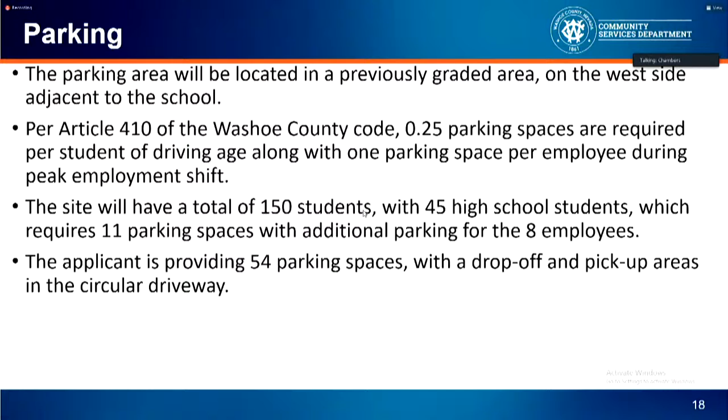For landscaping, the applicant has indicated that a total of 5.28 acres of the overall site will be disturbed, and is proposing to landscape 46,040 square feet of that area, approximately 20% of the site, which meets Washoe County Code. So they're not asking for any modifications on landscaping. They're proposing a minimum of 182 trees and 1,082 shrubs. Additionally, there will be 1 tree installed every 50 feet along the street frontage, and 1 tree for every 10 parking spaces. All disturbed areas will be re-vegetated with native seeds and trees to stabilize slope disturbances, and any imported material will be certified weed-free.

So here's the landscape plan. You can see where the trees are going to be located. It also shows where the parking is, and traffic will come in along that circular drive for drop-off and pickups.

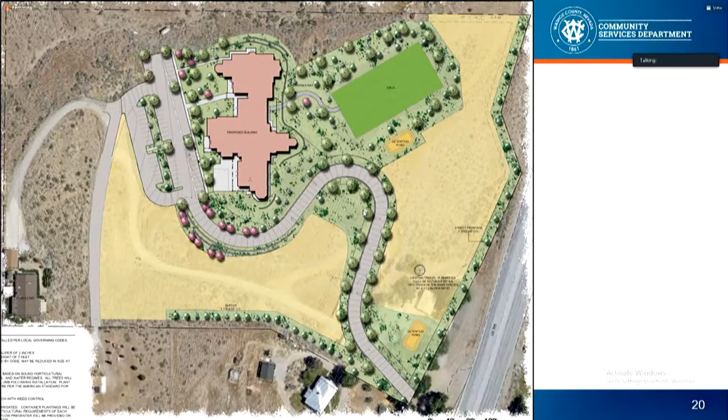The applicant held a neighborhood meeting on August 18th; however, there were no attendees. 65 parcels were noticed, and I did not receive any emails or phone calls.

Various agencies have provided conditions of approval, and those are included in the staff report. Staff is able to make all the required findings as detailed in the staff report, and I have provided a possible motion. The applicant's representative is available; he has a presentation or can just answer questions, whatever you would prefer. I'm available for any questions also.

Thank you. Is there any questions for staff? This is Rob, for the record, I do. Can we pull up slide 6, please?

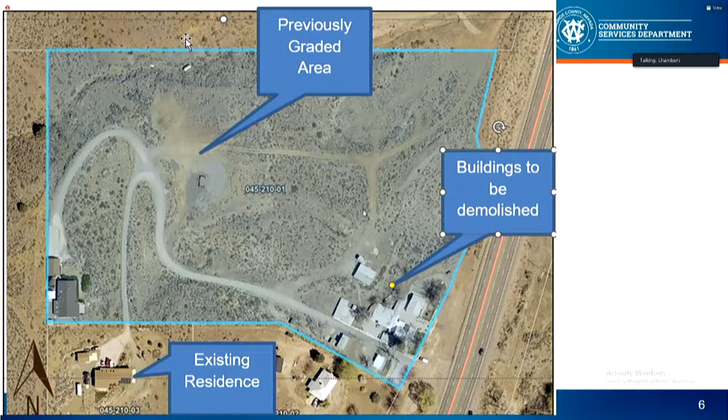Okay, so where you accidentally put that marker, the existing residence, that house down there, it looks like they're getting access from the property. Is there some kind of agreement? Can you speak to how they're going to get to their property? Yeah, I didn't include it in my PowerPoint, but it is included in my staff report that access will be maintained for that property, for both those properties. So that's an agreement the applicant has already established with that residence.

Okay, all right, thank you. Yeah, I should have pointed that out since it got moved. That's okay, that's all right.

So Julie, that residence there will have to drive through the parking lot of the school to get out to Virginia Street? Julie Olander, for the record: yes, and that's currently how they're accessing their house anyway right now, so their access won't change. It's not being altered. Okay, and the applicant's representative could probably speak to that more if you want some more details.

And the other thing I have, just for my own edification, is I noticed that within your report under utilities it said the applicant's previous approved SUP was with a commercial septic and well. I did not see that under conditions, but I will assume that would fall under health or something. That would be correct. They're going to still have to establish that the existing well and septic on the property will work for this new facility, and that's conditioned by the health department. Thank you, I appreciate that.

Any other questions for staff? Mr. Christensen?